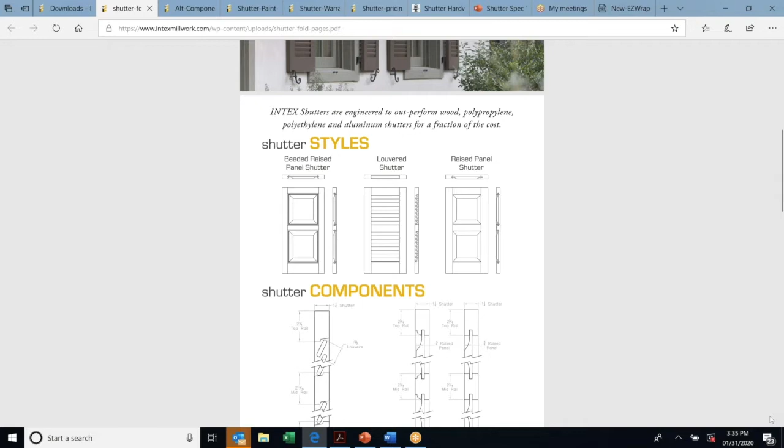INTEX shutters are engineered to outperform wood, polypropylene, polyethylene, and aluminum shutters for a fraction of the cost. Our product is made from a cellular PVC wood cellulose product. So all your rails and stiles, as well as the louver slats, are made from this cellular PVC wood cellulose product. The wood cellulose reduces the expansion and contraction and allows us to make this product so it'll perform, especially when painted dark colors. So it just reduces the expansion and contraction rate.

So the shutter styles we're offering: we have a beaded raised panel shutter. I'm going to zoom in on this here. Let me see if I can zoom in and scroll. All right, if you can see the screen, and I'm circling with my arrow, you see that little bead there, you see that definition.

We also offer this, if you go to the far right, a square edged version. So you've got a raised panel option where you can have a square edge on one side, and then on the back side is just a flat panel shaker. So basically you have a shaker panel, a reversible shutter with each one, except with the louvers. So if you're ordering a panel shutter, you're going to have a raised panel on one side and a shaker panel on the other. They can basically use them interchangeably depending on what style they want. But you do have the option of picking a beaded edge or having a square edge.

And then the louver is simply an open louver functional shutter. So let me scroll down a little bit.

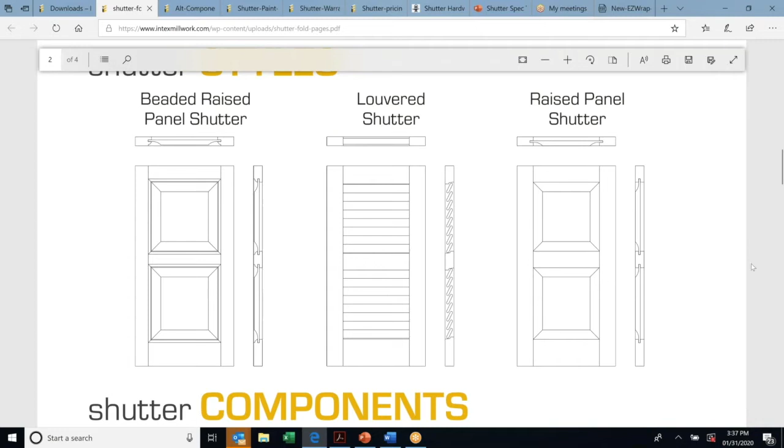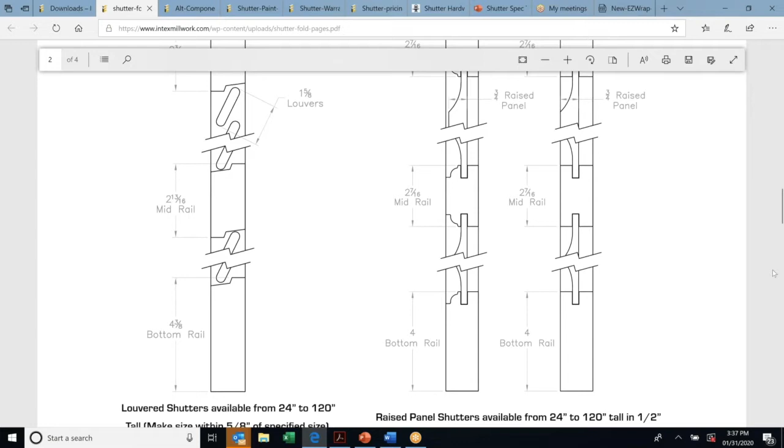So to give you some shutter components: the material is 1¼ inch. Top rails are 2 3/4. Your mid rail 2 13/16. This diagram shows you all of that. So 4 3/8 bottom rails, and then for the panel ones, you have a 4 inch bottom rail versus 4 3/8, and you can see the difference. Let me zoom out just a little bit.

This one shows basically two panels with a mid rail in each one, and then the louvers - you have a top louver section, a mid rail, and a bottom louver section. Down below here, you see louver shutters are available 24 inches to 120 inches tall.

Make size within—that stuff I don't really understand, the 5/8 specified size, but it has to do with where the mid rail can be located on a louver shutter. Because the slat is a certain size, there's only going to be certain places you're going to be able to locate that mid rail. You don't really need to know that—our office will calculate that when you have an opportunity.

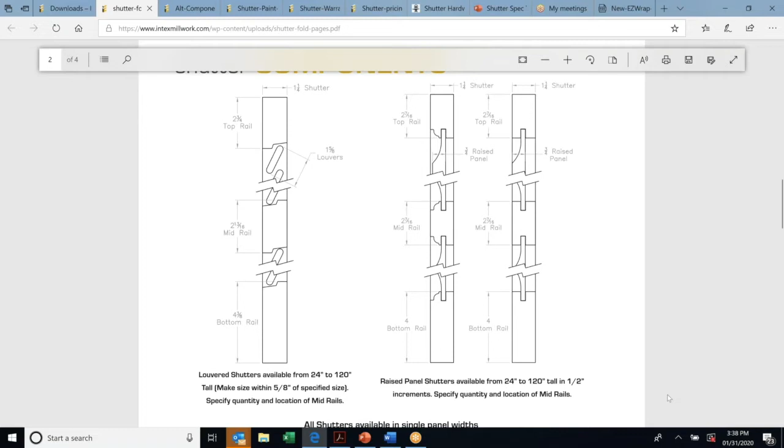Additionally, in the raised panel, you have the same options, and then you have 1/2 inch increments with that to specify mid-rail locations. But again, it'll be something we will work out as we get into your opportunities.

So let me see here. All shutters are available in single panel widths, 10-inch to 24-inch, in quarter-inch increments. So shutters, they're made to cut order and made to custom size. We have stainless steel powder-coated hardware and systems available, and painted with a premium acrylic coating, including dark colors.

Historically accurate—I know this has been approved for use in New Orleans, which is a tough market to get anything approved. So I know we can hopefully make some hay in some of the other historical markets you guys cover. Termite proof, available in 11 pre-finished color options, approved for historical restoration, louver and panel shutter styles, fully operable, will not rot or warp.

And then you see the basic hardware package that we have. So over here on the left, basically your two hinges and your pintles, which they sit on. And this is your mid-rail hinge. And then you've got these back plates for mounting.

And a lot of this stuff, guys, when I go through it—because we're going to go through a bit more—it's going to seem like a lot to take in, because there's a lot of subtle nuances to this. But I found once I was able to stand in front of a window with a shutter in hand and look at the different hinge options and those sorts of things, it started to really come together and make sense.

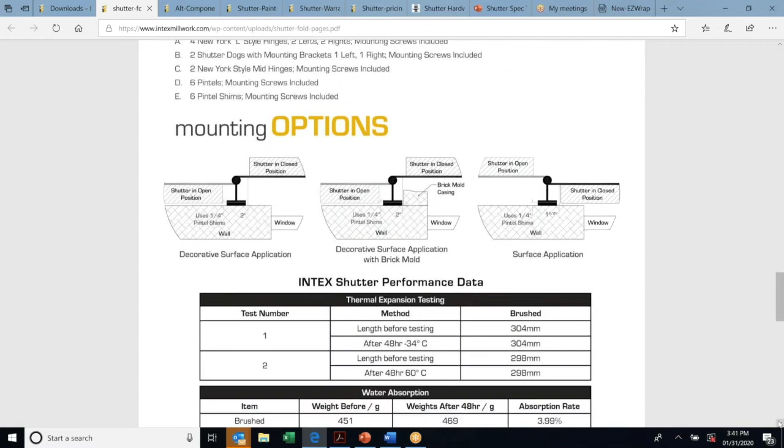Different mounting options with ours, and this is just our particular standard hardware. There is a lot more hardware to choose from based on the customer's application. I'm going to give you guys a website that you can always steer a customer to, where they can buy their own hinge hardware based on their particular application, but there are a lot of different options out there.

And it all has to do with where they're mounting their hinge and how they want their shutter to close into their opening or on the face of their opening. Some will mount on the outside of the brick. Some will have a window set in brick, but the window has flat trim around it, and they'll mount to the flat trim.

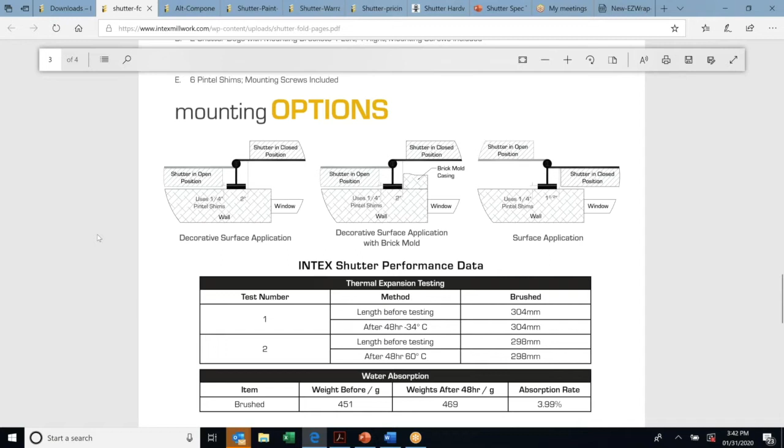So there's a host of different ways that people will end up mounting their shutters. There's several types of different hardware that will allow you to accomplish what they need to accomplish. But we can't have it all—we just don't know what everybody's application is. So we try to get all that information up front and share with them what we do have. And if we don't have exactly what they need for their particular application, the key is we can send them to a place where they can get what they need.

So you can see here, decorative surface application—again, they say decorative, so not really functional. The shutter in the open position is going to lay against the wall, and in the closed position, it's going to lay out in front of the window a good distance, because here's your window back here. And then in the decorative surface application on a brick mold, they're mounting it in behind the brick mold here.

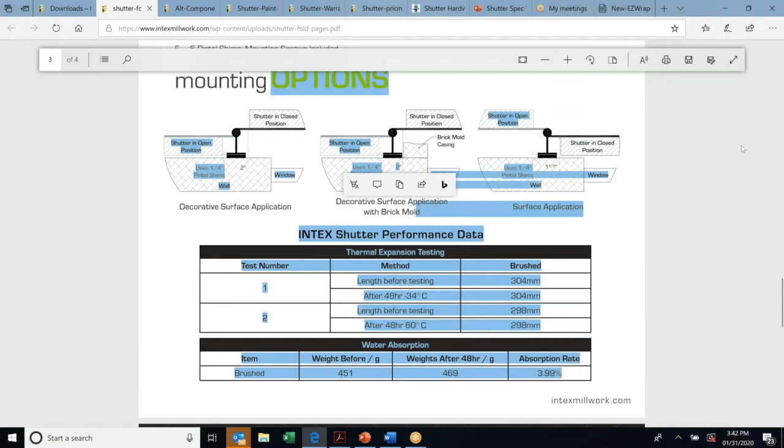In behind the brick mold here, and then in the open position, laying flat against the wall here, it's still leaving a lot of space between the shutter and the window.

In some cases, same thing here with surface application. In the open position, you can see this sticks out a little bit, and it would probably be slanted and held back by a shutter dog on the left. When closed, it closes in the closed position but does not have as much room here. Some people will actually mount their shutters so they're inside this opening.

So there's a host of different things we look for. When we're doing measurements, basically what you want to know is from the inside edge to inside edge, top and bottom, side to side of the trim, where the shutter's going to fit.

Now, if it's going to sit out on a surface like this, you don't have that problem as much, but you need to know where they're going to locate the pin in the surface application in order to determine what size shutter it's going to fit appropriately. We're assuming a 1/4 inch gap at every point, so a 1/4 inch gap in the center and on each end. Just so you have some idea of that.

But again, it's not that you're going to remember all this. What you need to remember is just getting us the opportunity into the office. Over time, we'll continue to educate you guys, and we'll continue to educate the customers, and we'll make sure we get it right.

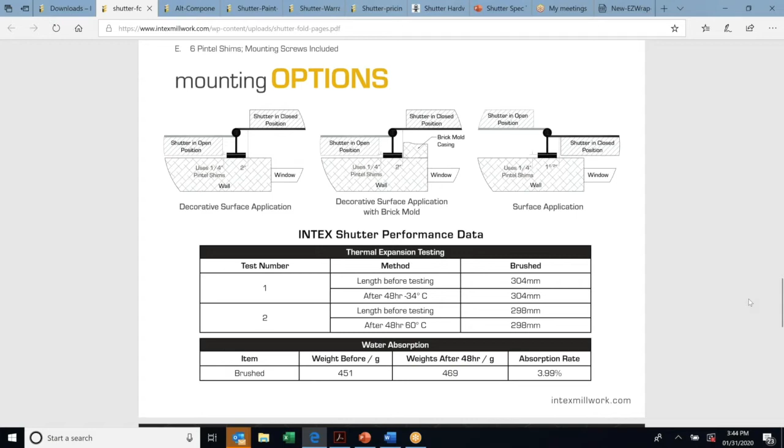So this gives you a little testing information, showing the expansion and contraction of the product. At minus 34 degrees Celsius for 48 hours, we're at 304 millimeters, and then taking it up to 60 degrees Celsius, 298 millimeters. So about a 6-point change there, not enough to really make any difference.

And then we have water absorption, just 3.99%, weight before and weight after, just showing you that it's not going to rot or deteriorate or really absorb water.

Your color styles, this is all in your brochure, so this makes it very easy for you to show the customer the different 11 color options, as I scroll down there. I think that's important because it's right at your fingertips, right on the website, easy for them to download. Another page that you have is, back.

So this is your shutter component views, just to show you what it looks like. Basically, it's showing the top rail and bottom rail, and the little thing I went over before, showing your beaded edge versus your square edge, and that sort of thing, available right on the website.

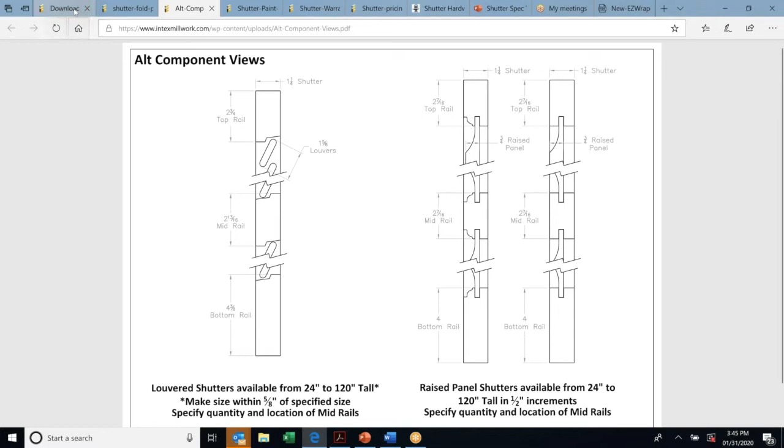Then we're going to go to your colors. You even have your color options all listed there.

So all this is right on the website, including your pricing for standard sizes. I don't know if I can get to that one.

Okay, you even have your warranty there. It shows you if they want the warranty, it's right at the website. You just download it, and it's available.

This is probably where you're looking for percentage of purchase price less taxes paid. INTEX will pay to warranty claimant related to years of use obtained after date of purchase, material finish. So 0 to 4 years, 100%, and in the first year we cover labor.

So then from there, 85%, 5 to 7 years is 85%. So it's a prorated warranty out to 15 years, and we only pay labor in that first year.

So here's your price list just for basic standard sizes. Again, this is all right here on your website, makes it very easy to find.

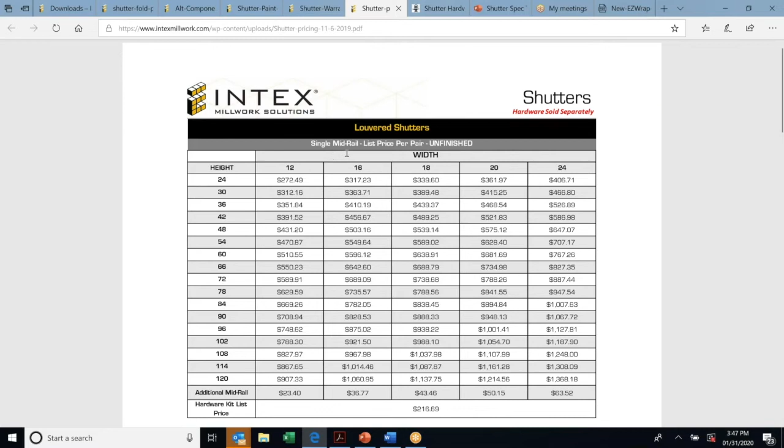So single, mid-rail, this price, and this is unfinished. So you have the option to get these unfinished, as well as get them pre-finished.

And it gives you basic sizes from 12 inches wide up to 24, and then from 24 inches in height up to 120 inches tall. Down at the bottom there, you'll see if you have to add an additional mid-rail in, which in the louvered shutters they do when we go to a 10-foot shutter, so you'll end up with actually 2 mid-rails in that.

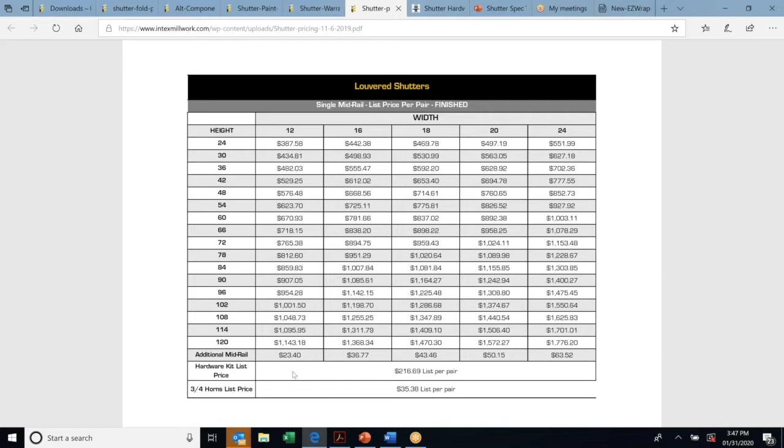But our office will go over that with the customer. We'll also probably draw it and show it to them so they know what they're getting and make sure it's what they want.

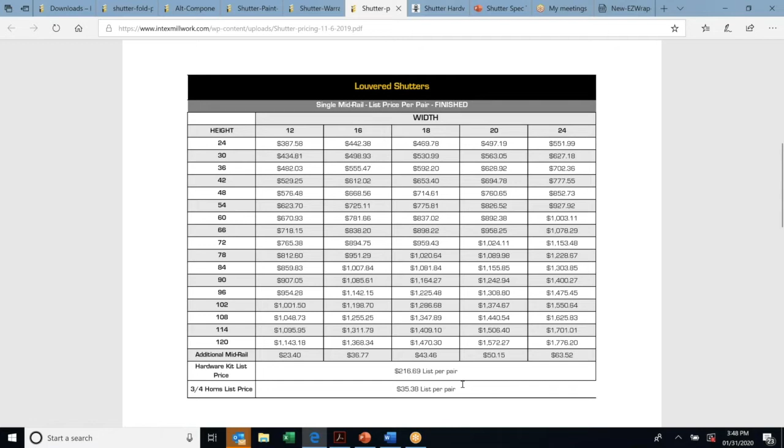And then the hardware kit, basically everything we talked about in the hardware kit that I showed you before. In your literature is basically what we're talking about right there. This is everything that's in your hardware kit right here, so that makes that fairly simple.

Then here's a company, you'll notice this is Lynn Cove. They're a foundry, and they make a boatload of shutter hardware.

It's just a place where if you have a customer that is not super familiar with shutters, or you're not super familiar with shutters, this is a good place to get your education. It kind of walks through offsets and what a throw is and all those sorts of things, different surface mounts.

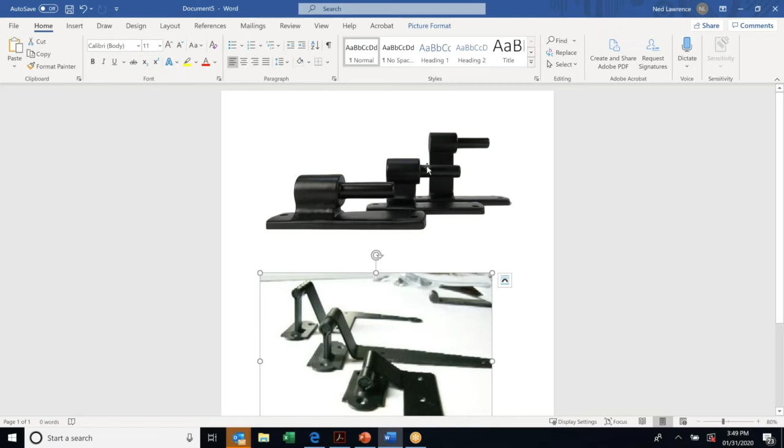And this is just a good place for them to go if they need different types of hardware. To give you some better view of it, you see the three pintles up here at the top. Each one has a different projection, and that's basically accounting for where they're going to mount that pintle.

And how the shutter is, whether it's recessed in brick or recessed in brick molding or mounted on a flat surface. And then you can see with the pintles down here, these have long angles to them before they get started into the flat part of the hinge, which mounts to the shutter. Each one is set up differently for different projections, based on that. So just to give you some view of that.

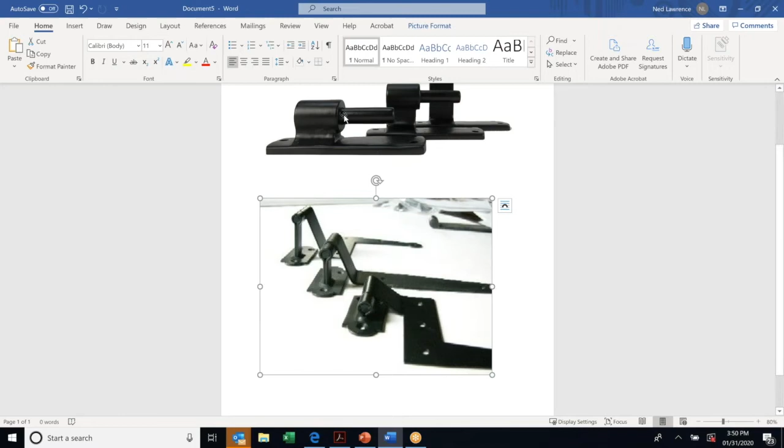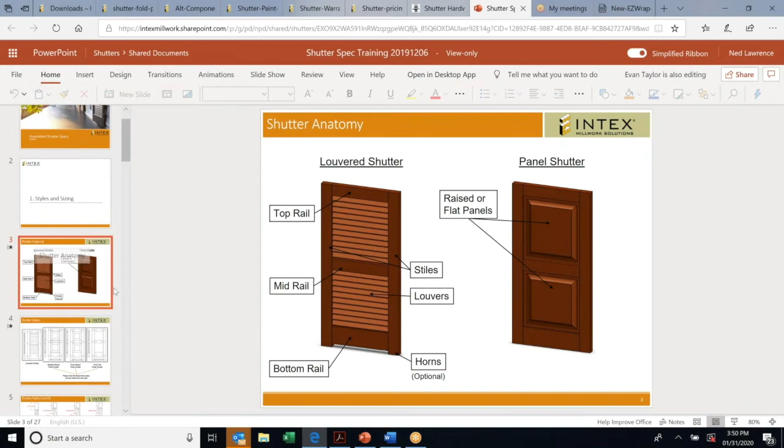So just real quickly, the components of a shutter, see if I can make this a little bit more. Let's give you a better view.

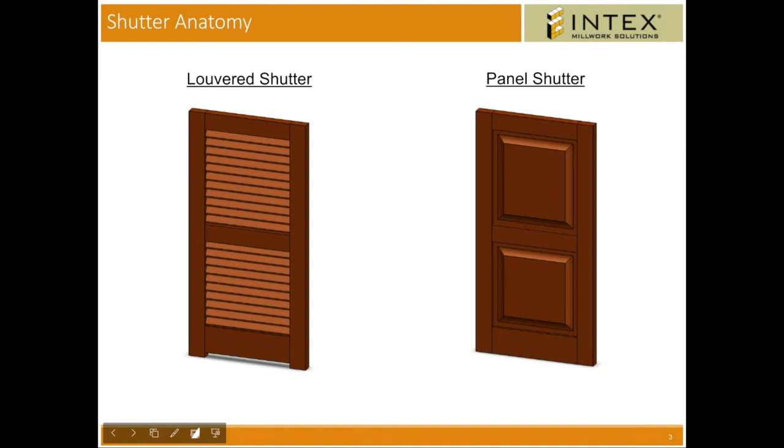Everybody can see that? All right, so louver shutter, panel shutter. Let's see if I can scroll through this. So you've got your top rail, a mid rail, a bottom rail, your stiles, louvers, raised panels, and horns.

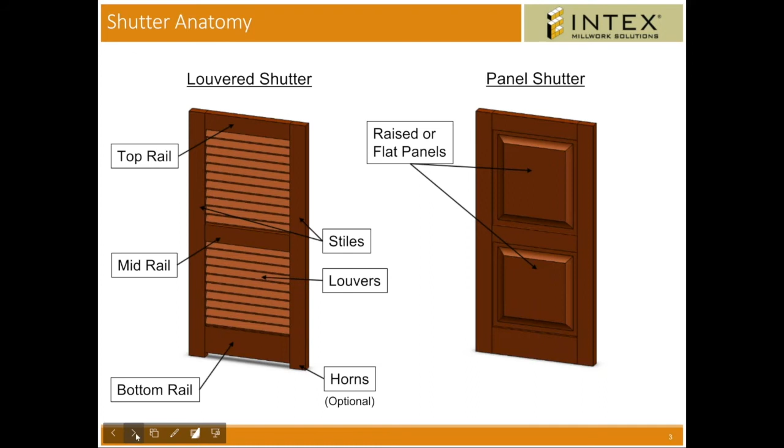You see this down here, this is something that you won't see very often, but from time to time in historic areas this was a common use, I think, to allow airflow under the shutter and above the sill, so it would reduce the amount of moisture that would collect behind there and allow any moisture and water to run out.

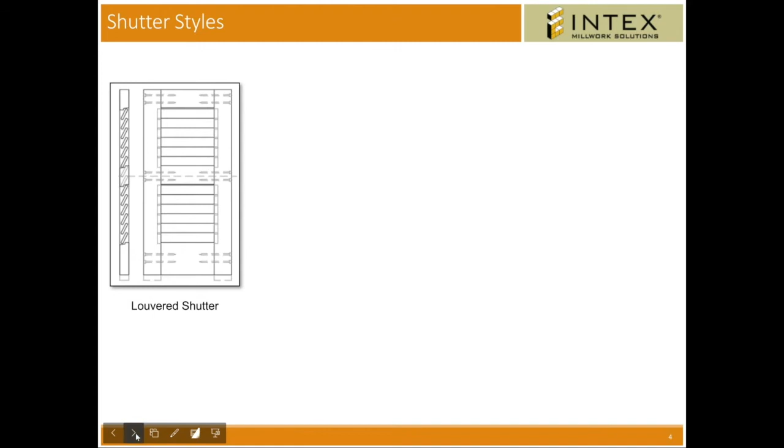Louvered shutters, showing you raised, beaded raised, and then flush raised panel, and then the standard shaker.

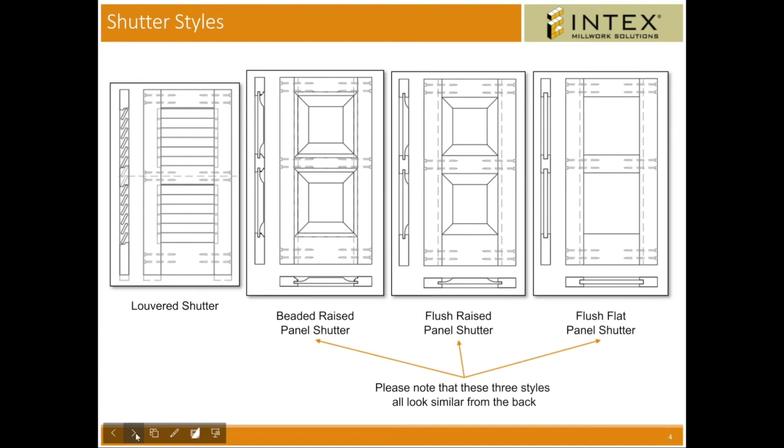I think this gets a little detailed, so let me just...

Make height, so basically what that is measuring from the top of the inside of your window where you want this shutter to sit. So if it's going to sit on the outside of the trim, then it may be underneath the brick, or it may be...

So a lot of times I think what would help is you take a picture of what they're trying to apply it to, and that will also help our office to be able to make sure that we're getting it right.

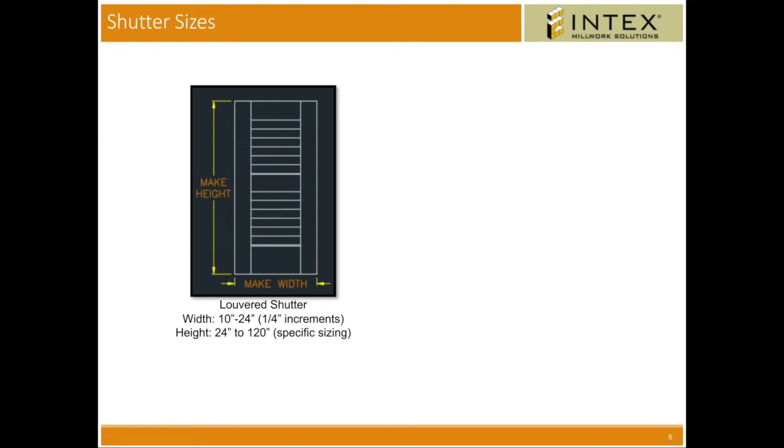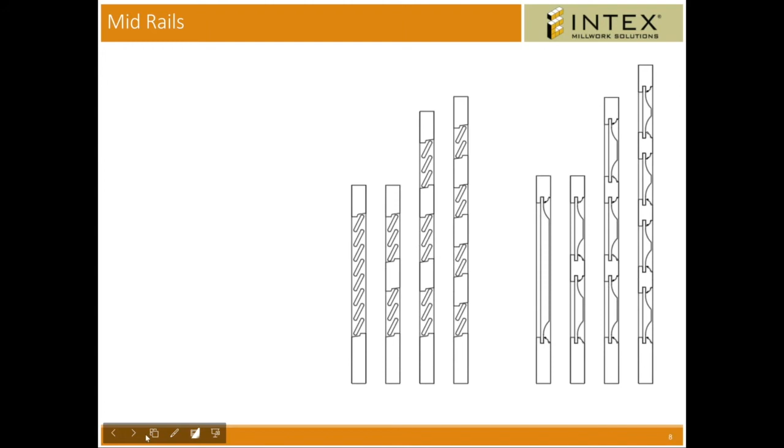Their size is continued, I don't think that's... you'll see here when I was talking about a couple mid rails and the louvered shutters, when you get to certain sizes, you're going to have possibly two mid rails in there to support that shutter and make sure that it holds together properly when it's in place.

Panel shutters can have mid rails placed anywhere within an opening with 1/4-inch increments. Shutters can be built with 0, 1, 2, or 3 mid rails. So if the customer has a particular style that they want, they can also get that.

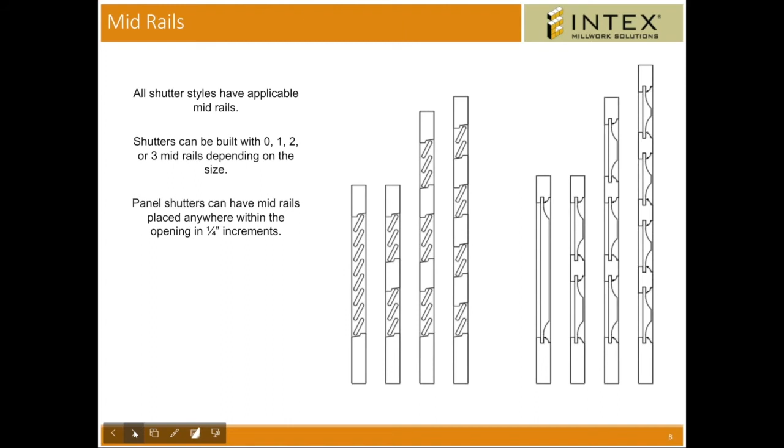I know with a single mid rail, it doesn't change the price to move the mid rail. So you could have a larger bottom panel or a larger louver section on the bottom and a smaller one on the top if that's what they want. And it really doesn't change the price.

Louvered shutters can have mid rails placed in specific locations since the mid rail covers 2 louvers exactly. So basically our mid rail is developed so where the 2 louvers is, we can move it to that and make it there.

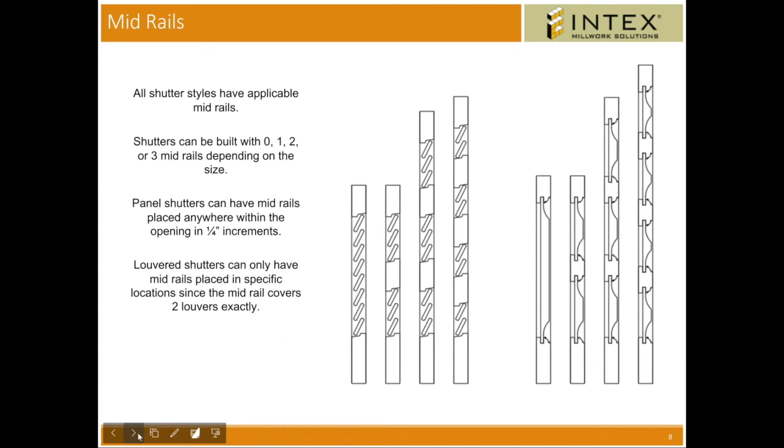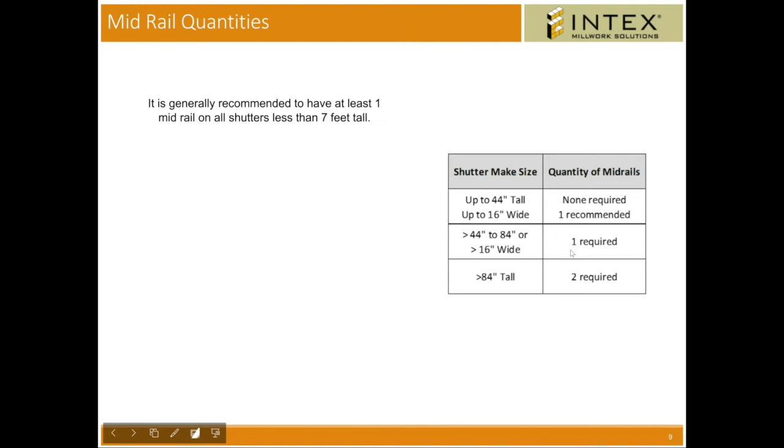So typically up to 44 inches tall and up to 16 inches wide, we really don't require a mid-rail. One is recommended after that. For 44 to 84 inches, we're typically putting a mid-rail in, over 16 inches wide. At 84 inches, you're going to typically get 2 mid-rails from us. So we're not going to make that an option for the customer once they get to those heights.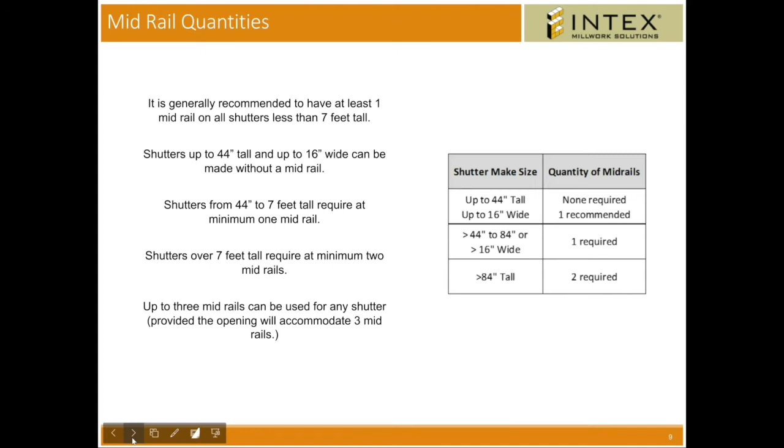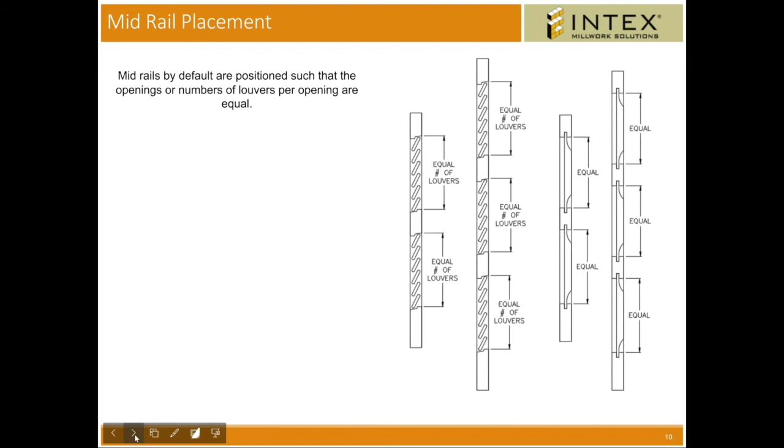So mid-rails by default are positioned such that the openings, or number of louvers per opening, are equal. That's what they're showing here, equal spaces. Alternately, the mid-rail position can be specified as a distance from the bottom of the shutter to the mid-rail. Let's click the next one there.

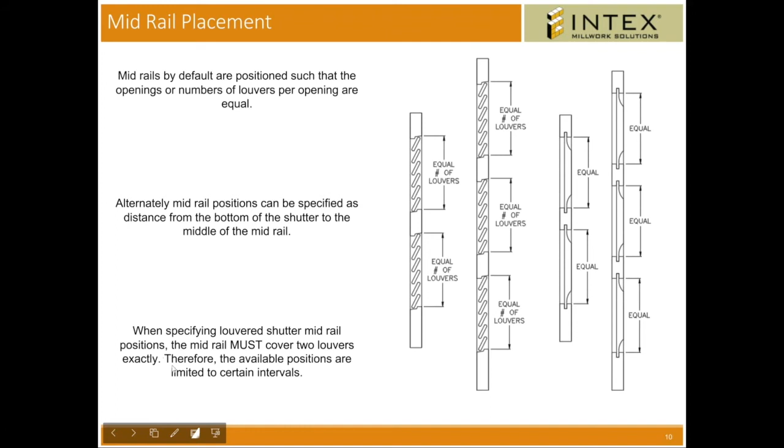When specifying louver shutter mid-rail positions, the mid-rail must cover at least 2 louvers exactly. Therefore, the available positions - but again, our office will work that out with your customer.

And make sure that we're providing with them - so these little things are called horns. Just in case, we can reiterate that again - sometimes called tails or feet, vertical stile extensions at the bottom of the shutter. And we do offer that, and that's only in the louver that we see it.

So if horns are applied, their dimension is included in the overall height. Basically the reason is, if the horns are long, they're not going to close. So you're still assuming this is the total make height that you want, from the bottom of the horn to the top.

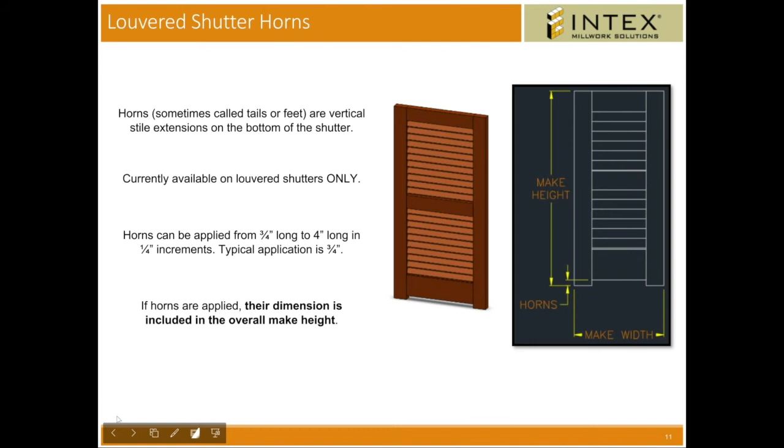And I think - escape out of that. Now, do we have any questions? Hello? Yes, sir. Everybody's pretty quiet. Hey Ned, this is Stephen Davis. Yes, sir. So outside of the Atlantic Classic collection, what would be the other big competitors to this shutter? There really isn't anybody making that.

All right, let me go back to that. So the Atlantic Premium Architectural Collection is the one we're probably most competitive against. They make a 1.25 inch shutter in their Architectural Collection. If you go to the Atlantic Premium series, they have 3 different options: a Pro series, an Architectural series, etc. The only one we're really going to be competitive against is the Architectural, which is their highest end shutter, and we should be roughly 10% under them in cost. So when somebody says Atlantic, you've got to make sure you ask those questions, because you don't want to waste your time - you won't be competitive against the Pro series. It's a 1 inch thick product, and just not as high quality in a lot of regards, so they're not really comparable.

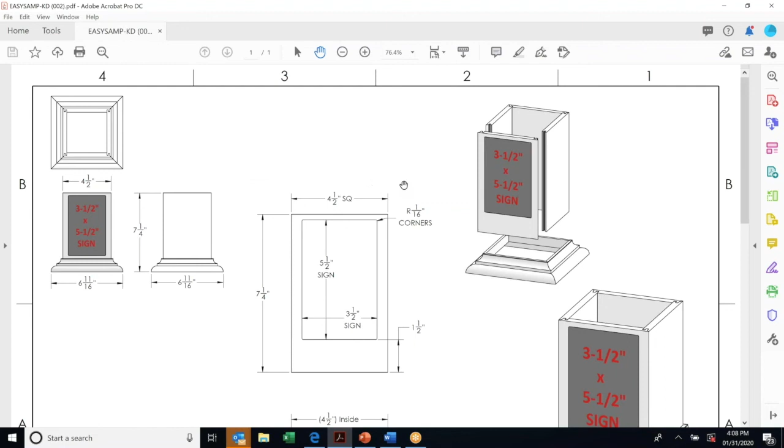It's got a lock miter that basically goes together as a lock joint, and comes in a lot of different sizes to choose from. On the sample, you're going to have a label that shows you all the sizes available, 8, 9, and 10 foot, and then the different widths from 4.5 all the way up to a 9-inch wide product. But you're going to be getting this knockdown easy wrap flat pack.

What's nice about it, guys, is I know when I was showing it with Stephen, some interest was developed because it's a flat pack. It's easier to store, it doesn't take up as much space. You know, a lot of the lumber yards are struggling with that. So to be able to have a column wrap that stores very well, is in a flat pack, easy to handle, easy to ship, and the guy basically just throws some 1x6 or 1x3 around the top and bottom. It's sort of the perfect product, well worth the money, and saves them a lot of time on the job site, and produces a better quality product. So we think you're going to have some great success with it.

I know just in my short travels, it's getting a lot of response. Each of you will have one sample coming on that pallet Matthew's talking about, and then in the warehouse very soon, we'll have 5 more samples for each of you that you can order.

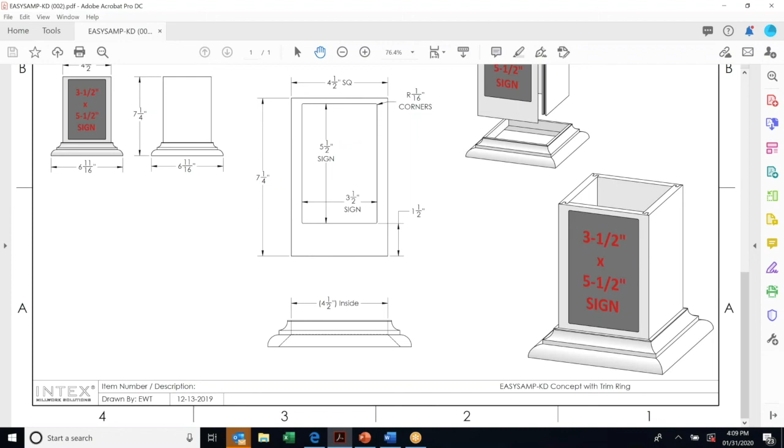Right, and it does not come with a trim ring, guys. It's just a shaft only, that's the whole deal. And the reason is the guys are just using that 1x product that's left over on the job site, and they're making the caps and bases right there. So we're just offering the shaft.